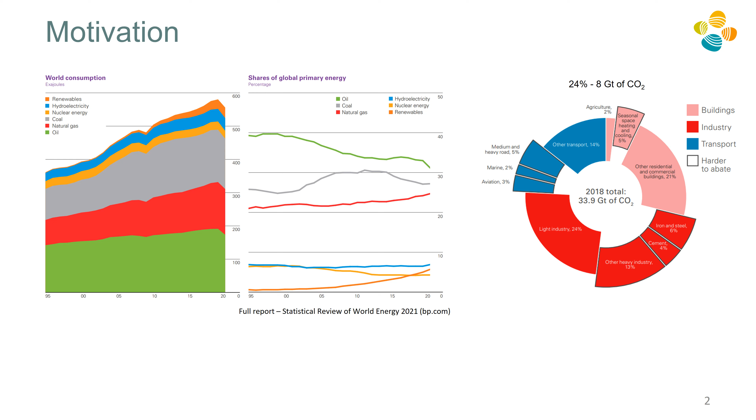This causes the problem we know as global warming and the increase of temperature of the planet, which will superimpose a lot of great problems to future generations. That's why governments and countries have adopted strict environmental regulations to reduce the emission to the atmosphere.

This includes adopting a low carbon diversified based economy, which includes the sequestration of emitted carbon dioxide from high emission sectors, and being able to implement some decarbonization technologies that allow us to further reduce our carbon emission.

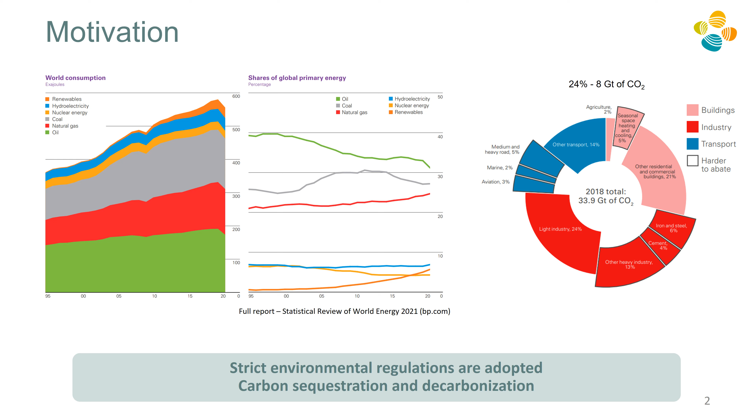Now we know that these regulations call for sequestrating CO2. Now how about hydrogen? Where do we see hydrogen in the whole decarbonization process? Hydrogen, according to many reports, has been regarded as a key player that will play a major role.

Hydrogen has a unique characteristic of storing energy, a higher energy density per unit mass compared to other fuels, and that could help the decarbonization process by converting many fossil fuels into a more environmentally friendly form of fuel, which is hydrogen.

There are many production processes that allow us to produce hydrogen. Some come from hydrocarbon and natural gas that goes through the steam reformation process, which helps to blend our produced hydrogen from the produced CO2, allowing us to have them stored underground without emitting any of those into the atmosphere, resulting in a much cleaner fuel type, referred to in the industry as blue hydrogen.

On the other hand, we have the green hydrogen, which is produced from renewable resources, and that could go through a process like electrolysis, which splits the hydrogen from water through a sophisticated process, and that type of hydrogen can also play a major role.

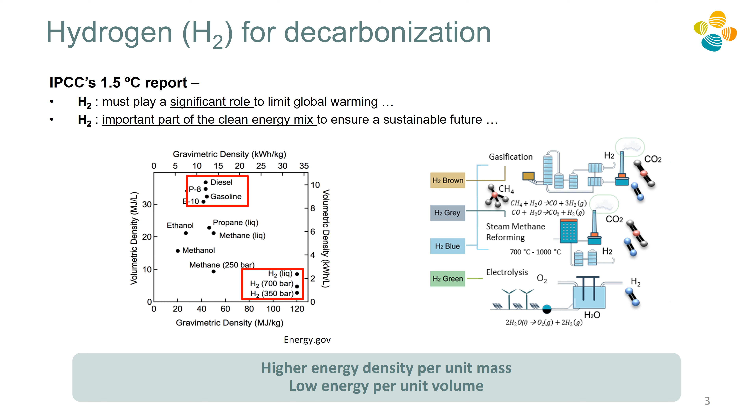Now, the CO2 could also be utilized in enhanced oil recovery techniques, and options for storing hydrogen and gases on the surface in general are very limited, which could only offer very limited capacity, going up to megawatts of energy supplies if you're talking about supplies that could last for days, maximum a few months.

But comparing that to underground options, we would have a much larger scale of capacity to be stored if we go for underground storage. Options could include salt caverns, depleted gas reservoirs, and saline aquifers. Those are the most known options.

Now, storing gas underground has been exploited several years ago, and the experience with that is very well known. CO2 sequestration in saline aquifers, for example, and trapping the CO2 through mineralogy and solubility processes, are also very well known by now. But cyclic storage of hydrogen in geological formations is still an area to be explored.

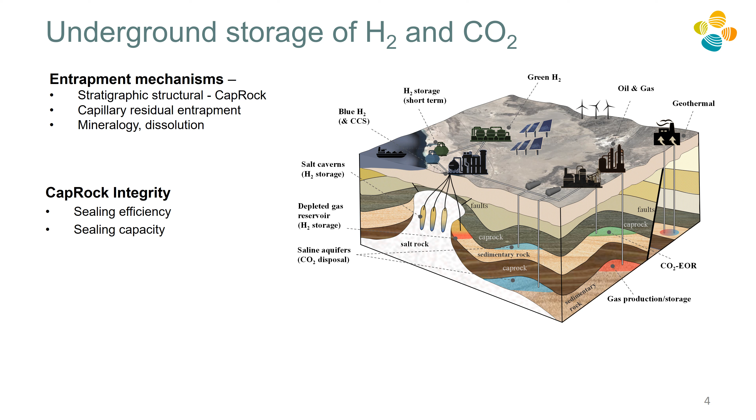In our presentation and work, we'll focus more on assessing the integrity of the caprock and how efficiently it can seal that free gas portion, and what will be the maximum capacity for the height of the gas column. That leads me to our objectives.

We would like to investigate capillary sealing efficiency and capacity using wettability characteristics of the caprock. In this analysis, we're using pure mica as a proxy of caprocks, as has been done in so many publications.

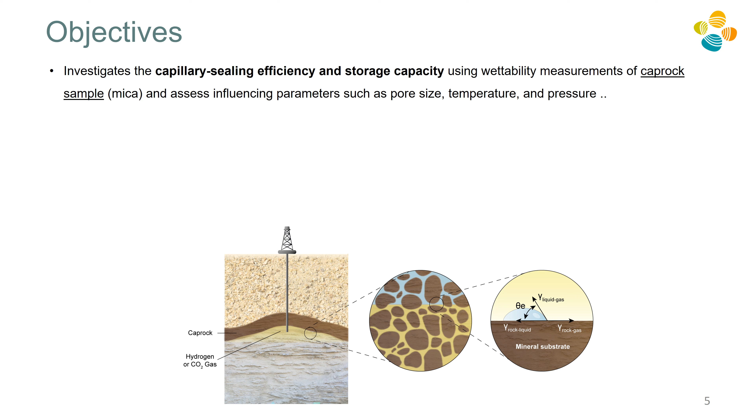Also to assess key parameters that could influence the efficiency of our caprock, related to the pore throat radius, temperature, and pressure, and then compare our pure mica analysis to experimental investigation using slightly more realistic conditions of the geological situation of caprocks, by introducing or synthesizing a sample with an aged organic acid.

Caprocks commonly include some organic acid that could range from carbon atoms of 2 up to 26, and that's what we're trying to mimic on the experimental side. We'll then further repeat the analysis to compare the pure mica case with the high concentration organic acid mica.

All of that under reservoir conditions and using a relevant brine salinity of 10% NaCl. Finally, organic acid could have a negative impact, and that's what we'll show in our slides.

A method to mitigate that is by restoring wettability. Nanoparticles is one option that has been exploited in the presented work, and we'll also assess how nanoparticles can be used and exploited at the lab.

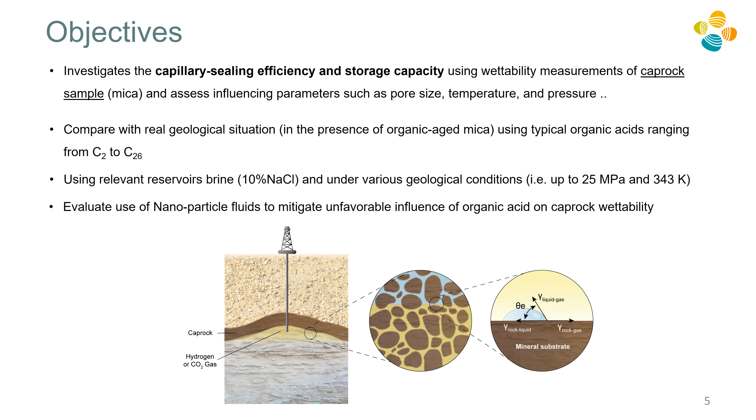So this is basically our objective, and let me start with some definitions and concepts.

For example, the method we're using is the tilted plate technique introduced by Lander in 1993, which is basically based on a tilted plate at a certain angle of 17 degrees, having a brine drop surrounded by the gas environment, and then we have the two contact angle tails.

One represents the receding contact angle, which is related to structural entrapment, and then we have the advancing contact angle on the other side, which represents the capillary residual entrapment.

The system, since its introduction, has been extensively used, and that's what we use in the whole analysis of the two cases: the hydrogen dynamic contact angle measurement, and also for CO2.

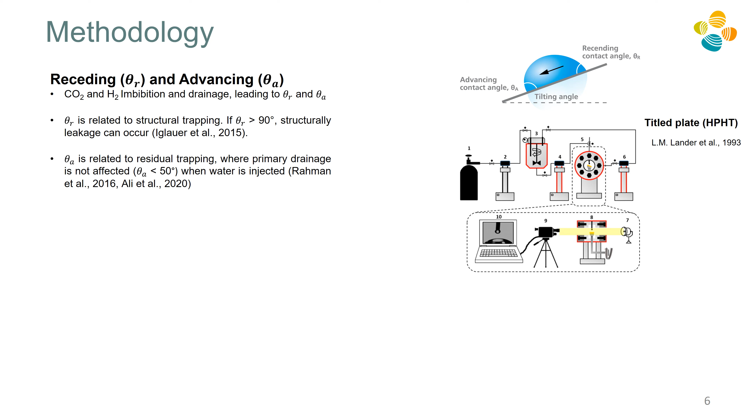Now, this is about the equipment methodology. The analysis is basically using the fundamental capillary pressure equation that is a function of the interfacial tension of the gas and liquid, and also a function of the effective pore throat radius inside the caprock.

At the same extent, we can also relate the maximum height exerted by the free gas against the capillary entry pressure. We can find that maximum height as a function of the density difference between the liquid and the gas, and that's what we attempt to show in the analysis of the measurement.

Now, in this case, we would like to highlight that it's only related to the connected reservoir case. So if the pressure inside the reservoir is equal to the surrounding pressure, which could happen by having continuous support from, for example, an aquifer beneath that portion of free gas, then across the caprock we will have the same delta pressure. This analysis could only be implemented in connected reservoirs, so that's very important information to highlight.

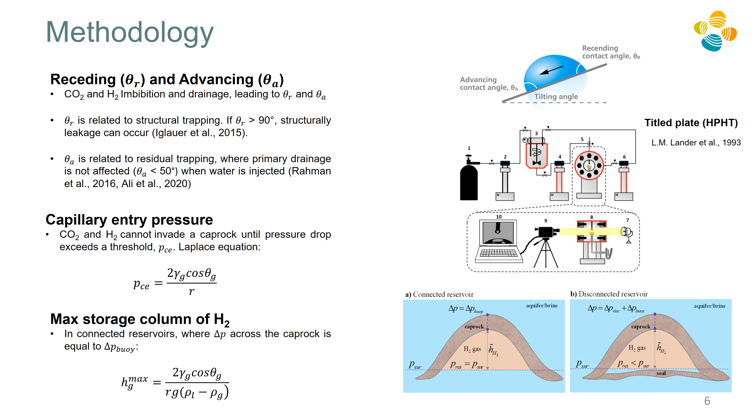Now let me jump to the results right away. These results have been published in two publications, conducted at the same conditions, using the same laboratory. This is the contact angle measurement of our pressure over different temperatures that go up to 343, for hydrogen and CO2.

Generally, we can observe two conditions that could be favorable for gas storage. As the pressure increases, the contact angle increases for both receding and advancing contact angle.

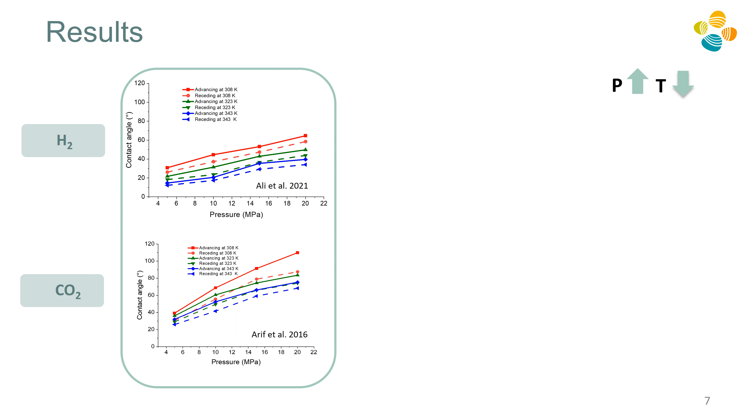This tells us that the contact angles are moving toward more gas-wet characteristics rather than the strong water compatibility that we desire. If you notice, it has a higher impact on CO2 compared to hydrogen, and that's basically because of the low density of hydrogen compared to CO2.

Now we added an analysis that's frequently used, a semi-empirical correlation based on Young's equation, to calculate the equilibrium contact angle as a representation of the intrinsic contact angle, to overcome the surface reference, which could be a drawback of using the tilted plate measurement and which could limit the certainty of the measurement.

But for us, it gives us the average of both, and that shows us basically the same trend: pressure and temperature both have a great influence.

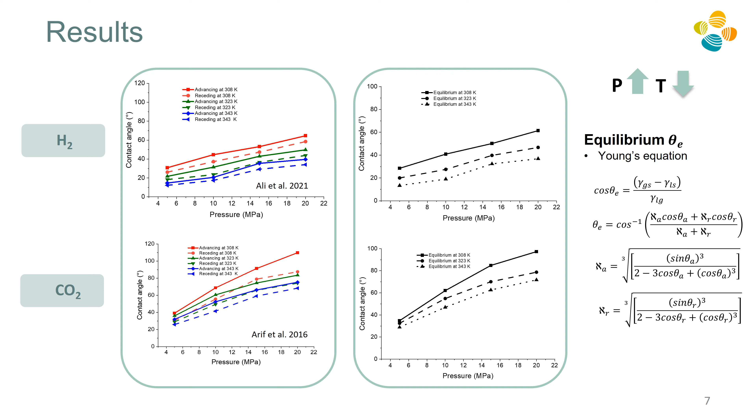Now let me shift to the capillary entry pressure that we've calculated, plotted against the pressure. This correlates with the contact angle: as the capillary entry pressure drops with pressure, that means we have less resistance to the buoyancy pressure exerted by the gas. It's more severe for CO2, again because hydrogen has a very low density compared to CO2.

Now we try to use a typical value for a mica pore radius, which could go as high as 10 nanometers, and you can definitely identify the great impact on the hydrogen injection. So the lower the pore radius, definitely we'll have a higher capillary entry pressure, and that's what we're showing from our analysis.

And again, we follow the same concept by calculating the maximum height that we can have from a free gas, also related to the pore radius and the change in temperature and pressure. So now our favorable condition could be a warmer reservoir with very low pressure and very tight caprock with a very low pore radius. So this is just the kind of conclusion using a pure mica.

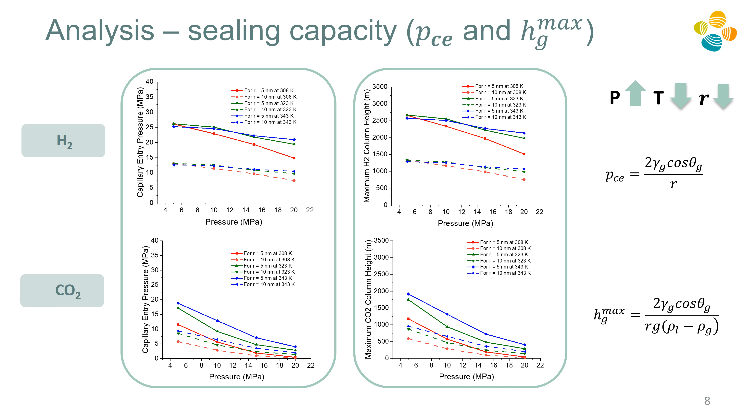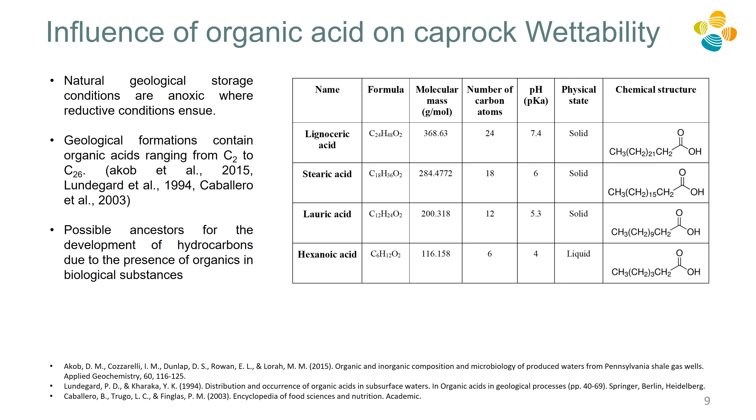Now, what happened if we have the implication of having a high concentration of organic acid? So the experimental work selected 4 representative acids that we aged the pure mica with, and that's what we're trying to assess. So we pick the analysis, plot them with an incremental increase in the organic acid concentration, and that's what we're showing from these 2 plots.

In the x-axis, you would see the organic acid concentration. It's a minus log of the concentration we used. So what we have here is 10 to the power minus 2 up to 10 to the power minus 9.

As we increase the concentration going this way, we will definitely have a higher impact shown by the data, which could go even above 90 degrees of contact angle, and it's more severe in the CO2 case compared to hydrogen.

Doing the same just to show an average trend using the equilibrium contact angle calculations, and this case is only for a specific pressure and temperature, just to show you an example.

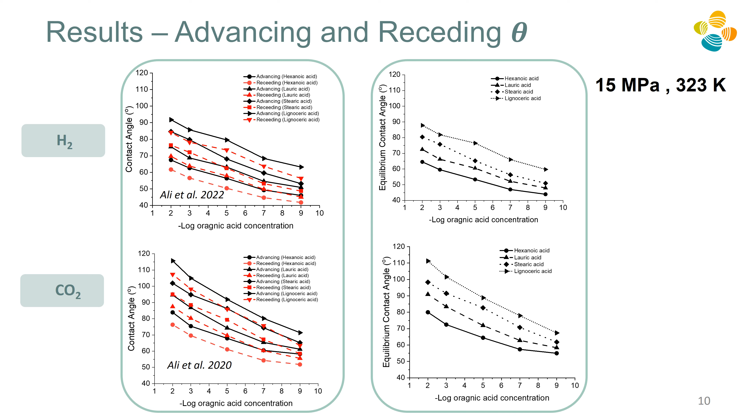So they have a high influence on the contact angle, and looking at it from the capillary entry pressure and maximum height of the gas column, we can see the higher the concentration inside the mica sample, the lower the capillary entry pressure, which could go to a negative value, which could also create a negative suction of that gas, allowing the invasion of gas throughout the caprock.

And this is showing in terms of the maximum height in the gas column, which shows some negative values, meaning that we have that much gas inside the sample.

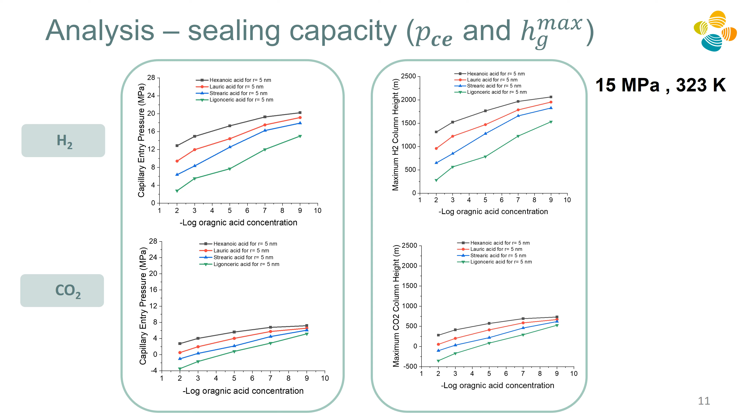Now, the experimental work also extended to include the use of nanoparticles. In this case, since we have mica, and nanoparticles are a surface activating agent, aluminum oxide was well suited to be used with mica, and that's what we used.

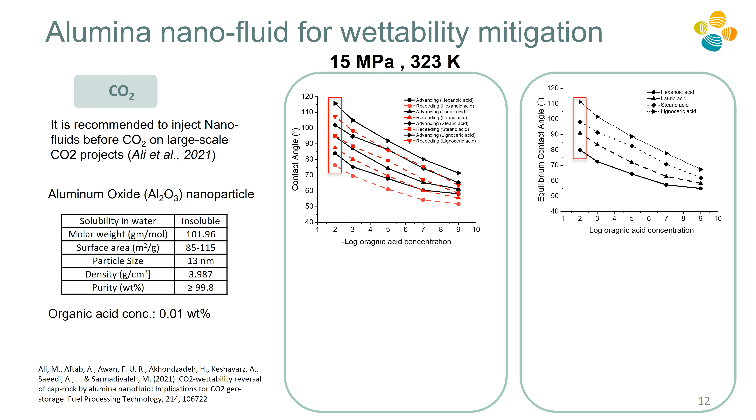So we picked only one concentration, the highest concentration that we have, and the objective here was to identify the optimum concentration of the nanoparticle that could be used in a real situation—if we inject it back, will we be able to effectively restore the wettability. That work has been done and published in a recent publication, and that's what we're trying to show here.

It's only at the lab scale, but if we want to upscale, there's a lot of factors that could get involved in this. This shows you at the lab scale what can be done prior to going for a larger scale storage of CO2, for example.

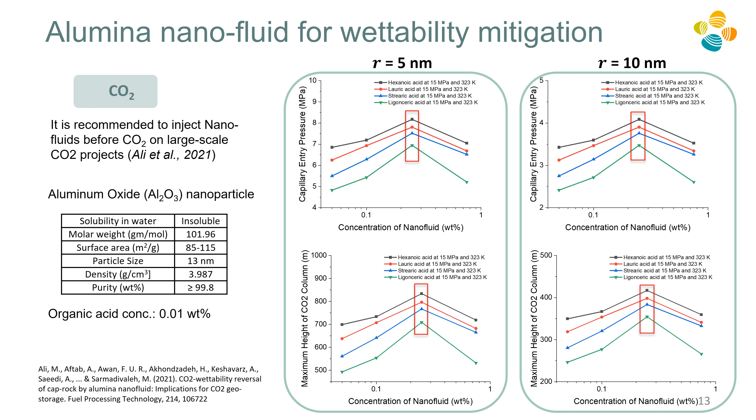This is only CO2 data. With that, we would also like to show some of the capillary entry pressure measurements, how we could look at it from a different point of view. So you can see the capillary entry pressure—we used different pore radii just to show again the influence—and you can see the capillary entry pressure has increased up to an optimum value. Even if we go beyond that, we will not have that value or that concentration of the nanoparticle.

Now, with that, I would like to conclude. So we showed that using pure mica, the sealing efficiency could increase with decreasing pressure and increasing temperature for both hydrogen and CO2. Smaller pore size is better for efficient sealing. The higher the concentration of organic acid, the lower the efficiency, and also we will have a very low maximum height of the stored gas.

Finally, nanoparticles as a technique used in the industry to restore or alter wettability has been exploited here, and it shows that we can also identify an optimum concentration that could help restore the wettability into a more favorable condition for gas storage.